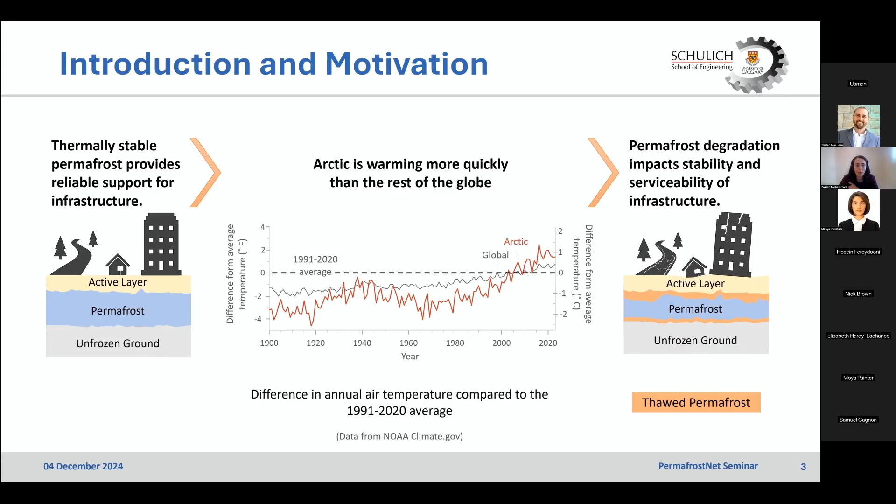This means both maintenance of existing infrastructure and planning for future development will be impacted significantly by permafrost degradation. To better understand this impact, we need to take a closer look at the challenges facing foundation design in permafrost regions.

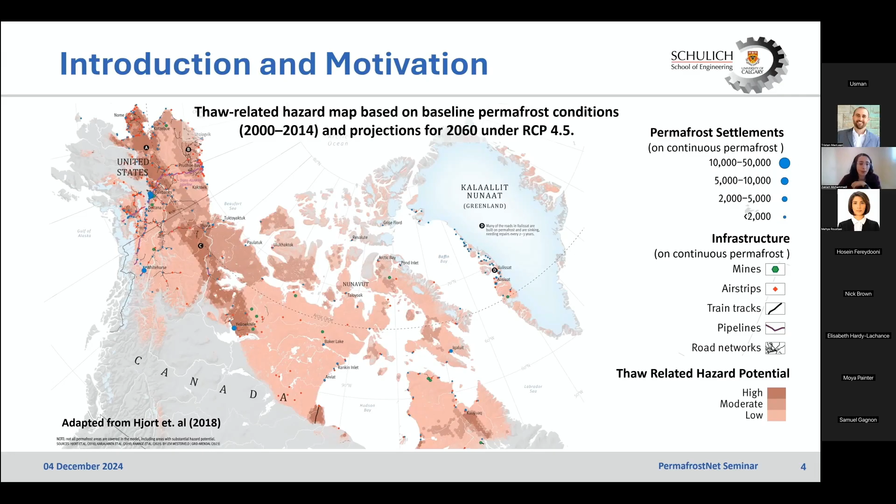One key challenge for infrastructure in permafrost regions is thaw settlement. Thaw settlement happens when thaw-sensitive permafrost, which changes in volume or loses strength after thawing, begins to thaw. Thaw settlement is a product of two main factors: thaw strain and changes in permafrost extent. Thaw strain mostly depends on ground material and ice content, while changes in permafrost extent are affected by baseline permafrost condition and alteration caused by climate change and human activities.

Traditionally, foundation design in thaw-sensitive regions was based on passive methods, aimed at keeping permafrost frozen to avoid thawing and prevent settlement. But with the accelerating pace of climate change, these approaches are becoming less feasible and increasingly expensive. This has shifted strategies toward active methods, based on designing foundations that can accommodate changes in permafrost condition, one of which is thaw settlement.

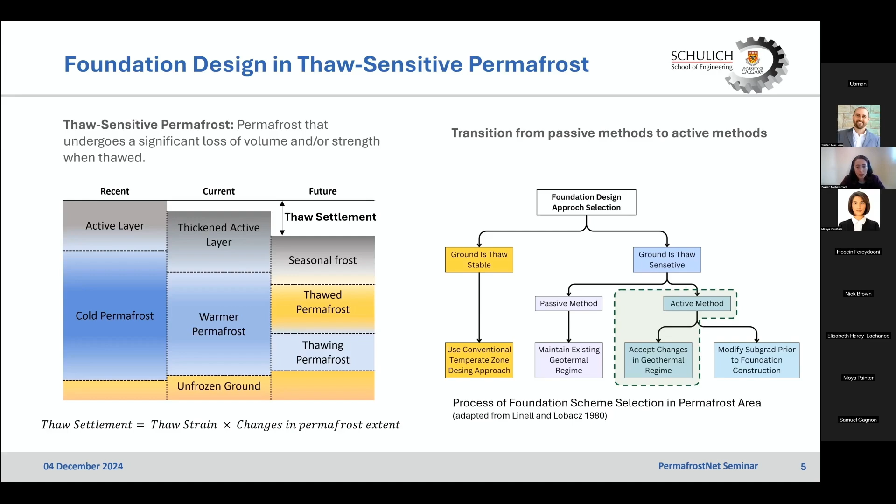So to effectively implement active designs, it's crucial to accurately predict thaw strain and the extent of permafrost changes. With this background, the overarching objective of my research was to develop a comprehensive framework for thaw settlement evaluation, because we believe this will become more frequently needed in the future with changing climate conditions and foundation design strategies.

To achieve this, we focused on several key goals: identify and centralize tools useful for predicting thaw settlement, improve prediction where there were gaps or shortcomings by developing new tools, improve our ability to identify thaw-sensitive regions, and finally create workflows that allow evaluation of thaw settlement across multiple scales.

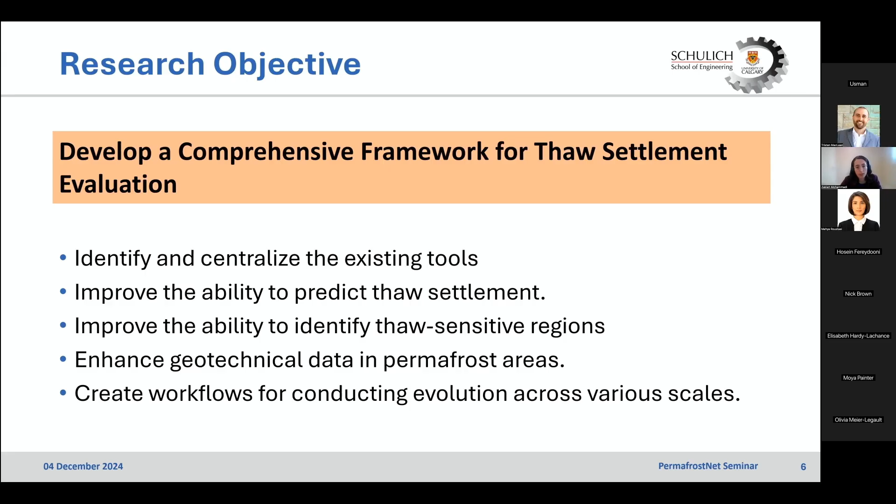To achieve these objectives, we used a systematic methodology, designed to address the gaps in existing thaw settlement tools and create new ones where needed.

So the process began by reviewing and centralizing existing tools, and this literature review helped us identify the gaps and try to address those gaps. Particularly, we could see that tools tailored for coarse-grained and highly organic soils were lacking.

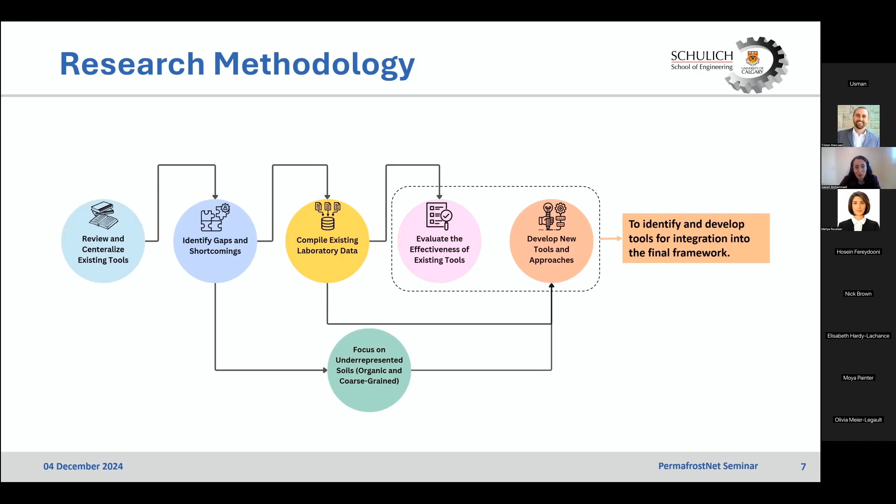We had fewer tools for these two types of soils. As part of this project, we compiled and digitized wide data on thaw settlement, because this was something we needed for addressing the gaps. Using the compiled data and the identified gaps, we were able to develop new tools and also evaluate the performance of some of the existing ones. I will explain the different steps we have taken in more detail in the upcoming slides.

You also can see the different components of the framework, which we mainly divide into two major categories. The first is used for large-scale vulnerability assessment, which helps identify thaw-sensitive regions using regional scale data. Then we have more site-specific assessment, which is focused on estimating thaw strain based on index properties collected during site investigation, so they rely on more site-specific data.

During the site-specific evaluation, we can improve the data that we have, like the amount of the data and also the complexity of the method that we use, to have a more refined assessment. So this is just an overview, and many workflows need to go into these components to create the complete version of the framework.

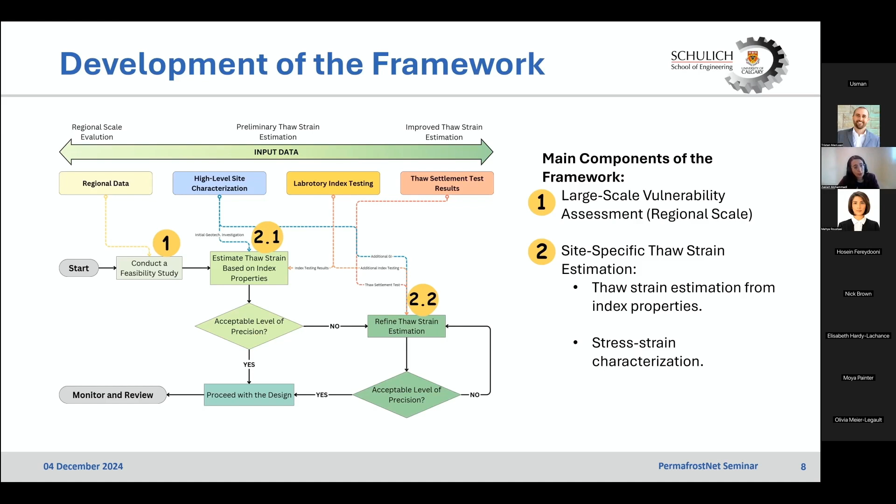So with this overview in mind, let's take a closer look at different components, and I will show literature review, what was already available, and what was our contribution for creating these components.

The first component is large-scale evaluation of vulnerability to thaw settlement. This component was integrated into this framework because we believed it is useful during feasibility studies. In terms of resources available to conduct this type of assessment, we have large-scale vulnerability assessment, mostly produced in a map format, showing thaw-related hazard maps for large scales, typically relying on coarse-scale geospatial data and climate data.

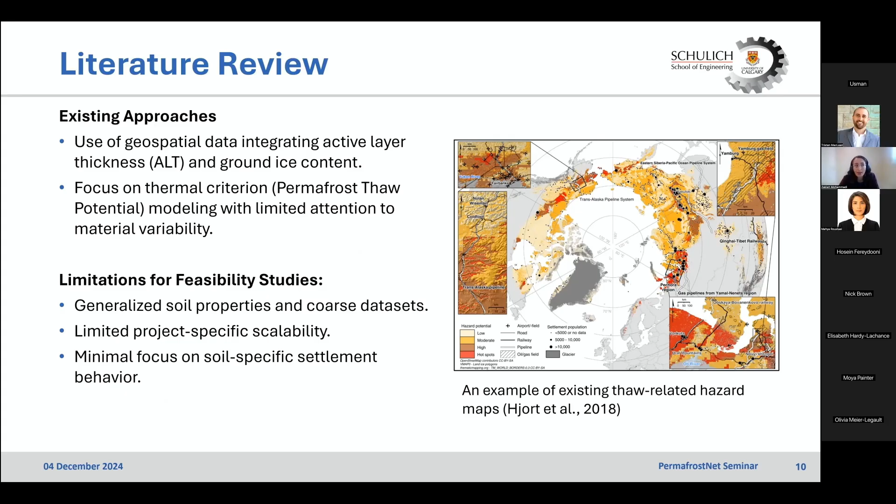Most of the existing approaches mostly focus on modeling changes in the active layer thickness, and they use ground ice to represent thaw strain. They kind of overlook the role of soil texture in defining thaw strain. So we decided to take a look at these gaps and try to develop some methods to address them.

To do so, we developed a new method which integrated soil texture into the evaluation of thaw settlement hazard more accurately, and we developed a Canada-wide thaw settlement vulnerability map using this approach. We also leveraged approaches used in developing the existing maps to create workflows and resources that can be used for conducting evaluation during feasibility studies.

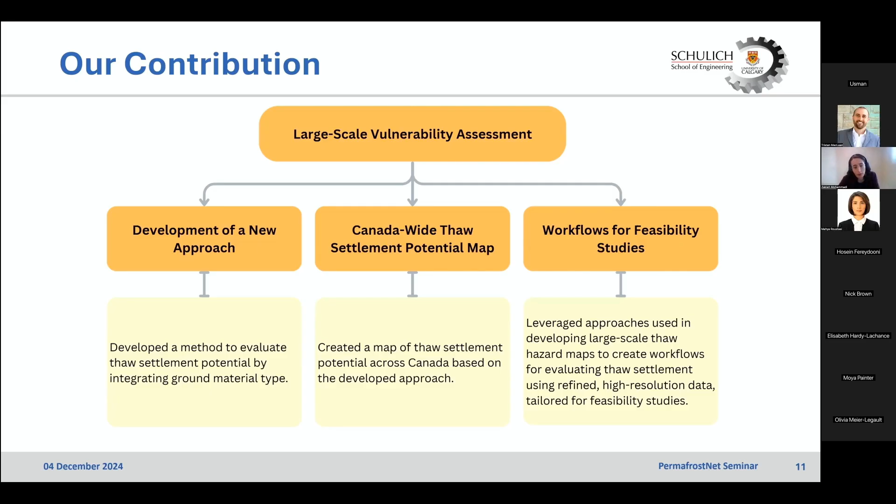So the approach that we developed was mostly focused on evaluating thaw strain. As I said, there are many maps and approaches focused on accurately representing changes in permafrost extent, or comparing the existing or current active layer thickness versus projected active layer thickness, and they kind of overlooked the thaw strain part of thaw settlement.

So we focused on this component, and we incorporated three key variables to assess what we call susceptibility to settlement: ground ice content, surficial deposit type, and bedrock type. The idea is this is some sort of assessment you can do during a desk study evaluation, so we wanted to rely on publicly available resources.

We used the analytical hierarchy process to assign weights to each variable based on their importance in defining thaw strain. So we were able to create an index called the thaw settlement potential index, and then we created a map of this index for Canadian permafrost, as you can see here.

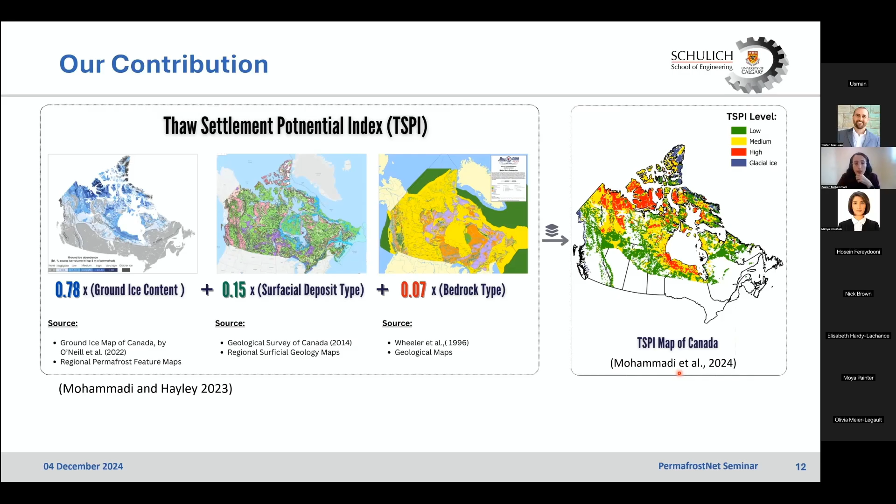To create this map, we simplified the changes in the active layer thickness. We assumed that near surface permafrost thaws, and then looked at the distribution of vulnerability to thaw settlement across Canadian permafrost.

Using some existing approaches and what we developed, we created workflows. The idea is that these workflows provide a step-by-step guide to conduct a desk study evaluation. We combined susceptibility methods focused on evaluating changes in permafrost extent with the approach we created that is mostly focused on settlement susceptibility.

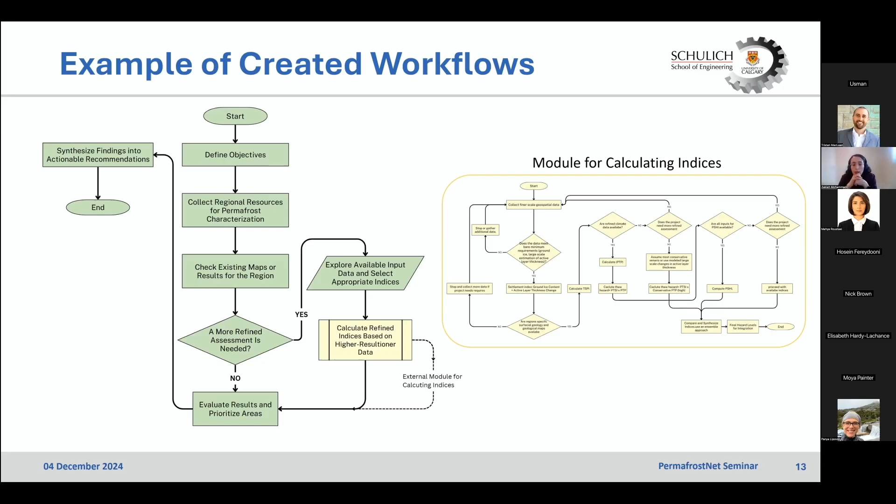We separated these two parts, and following these workflows, one can evaluate both separately and then integrate them at the end to have a better understanding of the hazard associated with thaw settlement. The process begins with defining the study scope and collecting relevant data, and ends with actionable outputs to support planning, for example identifying areas for future investigation, identifying more sensitive areas, and comparing development options and prioritizing different sites or roads during the planning stage of a project.

The other component we are planning to integrate into this framework is tools that are mostly focused on estimating thaw strain based on site-specific data.

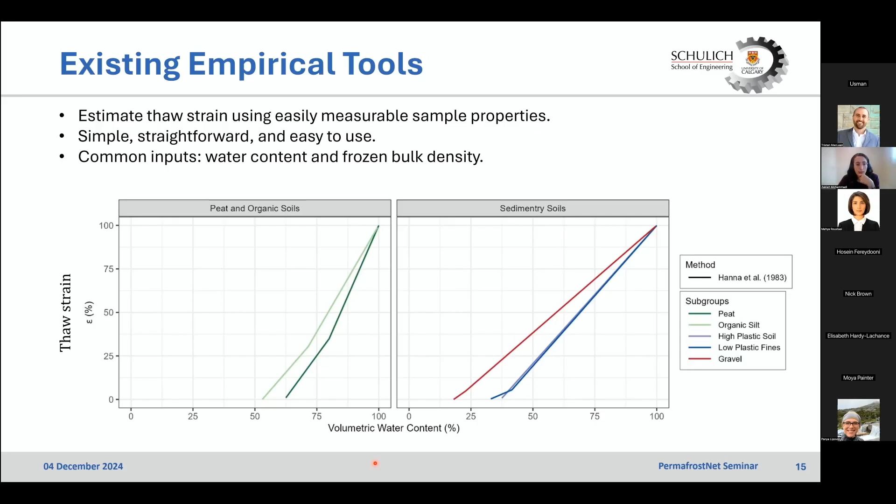When it comes to estimating thaw strain based on site-specific data, empirical tools are widely used. They are easy, straightforward, and use easily measurable properties like water content and bulk density to estimate thaw strain. Here is an example of a method developed by Hanna et al., which provides soil-specific correlations for five different soil groups, using volumetric water content as a predicting variable. This method is recommended in the Canadian Foundation Engineering Manual for obtaining thaw strain in thaw-sensitive regions.

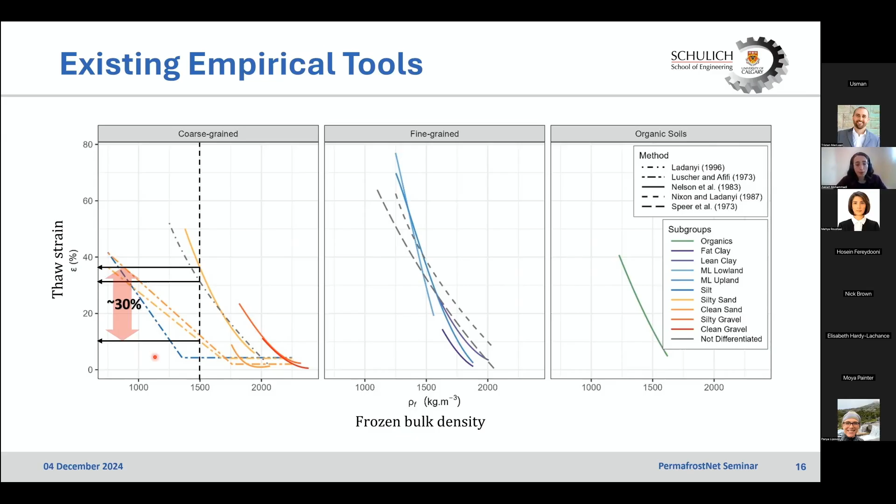These were some observations from our literature review. We then had to obtain laboratory data to develop new tools, evaluate the performance of existing ones, and identify tools that were more effective to integrate into the final framework.

We started by compiling a data set of thaw settlement test results and were able to identify and collect more than 400 samples. The data we collected included not only the thaw settlement test results, but also sample properties, index testing results where available, and grain size distribution.

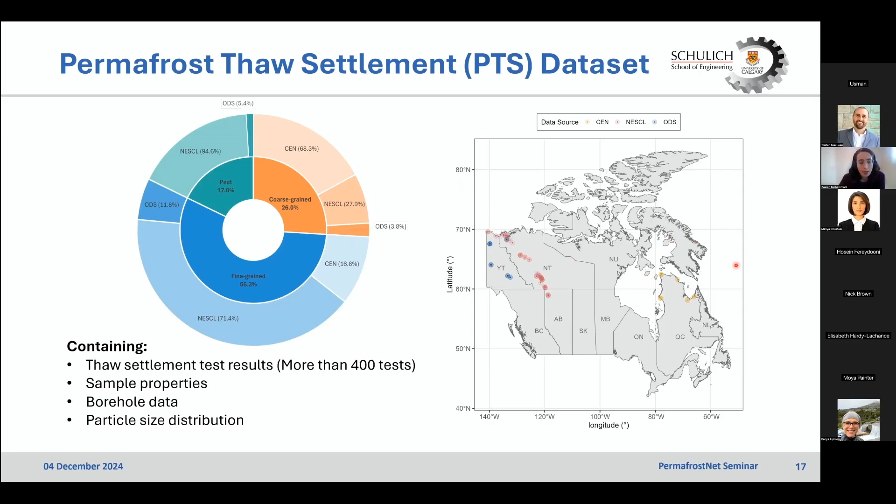The data set represents a diverse range of sample types in terms of soil group, and the samples come from different regions across Canadian permafrost, covering a vast geographical landscape. We digitized relevant information found in published literature and old consulting reports to create these data sets.

For each sample we had thaw settlement test results, which basically simulate one-dimensional thawing of a permafrost sample. In this test, a permafrost sample is thawed under a seating load, and its deformation is recorded.

Once deformation under the initial load is complete, additional loading is applied to develop the full stress-strain relationship for the sample. For these tests, we plotted thaw strain against vertical stress, and also plotted void ratio against vertical stress. Thaw strain and void ratio can easily be converted between each other.

From these plots, we were able to extract comparative parameters. For example, uppercase A naught, the thaw strain parameter, and lowercase a naught, the coefficient of volume compressibility. We call these comparative parameters, and we extracted them so we could compare across different soil groups to see the general soil settlement behavior across those groups.

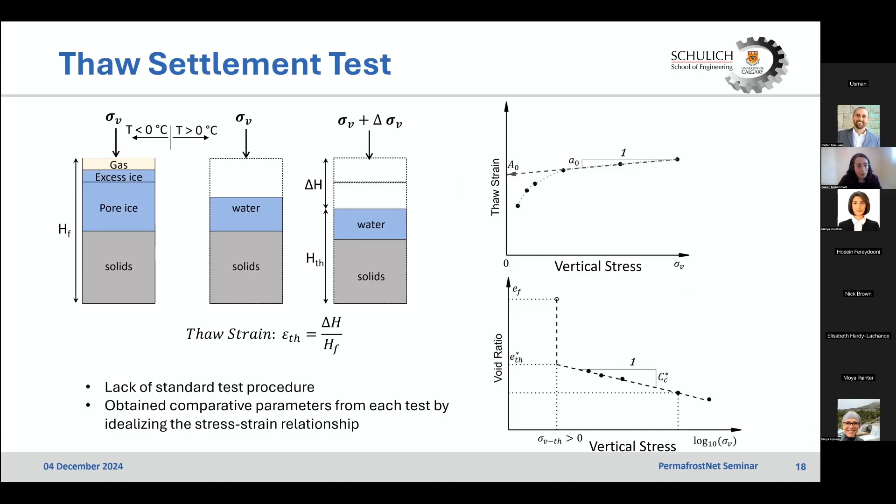For the coefficient of volume compressibility, we couldn't see that much dependency on sample being ice-rich or ice-poor, but there is a huge difference between values obtained for different soil groups, with the mean value of coefficient of compressibility for peat being about 8 times higher than coarse-grained soils and about 4 times higher than fine-grained soils. This comparison highlights the critical role of soil type in determining soil settlement behavior, and underlines the importance of having more soil-specific consideration in developing predictive tools.

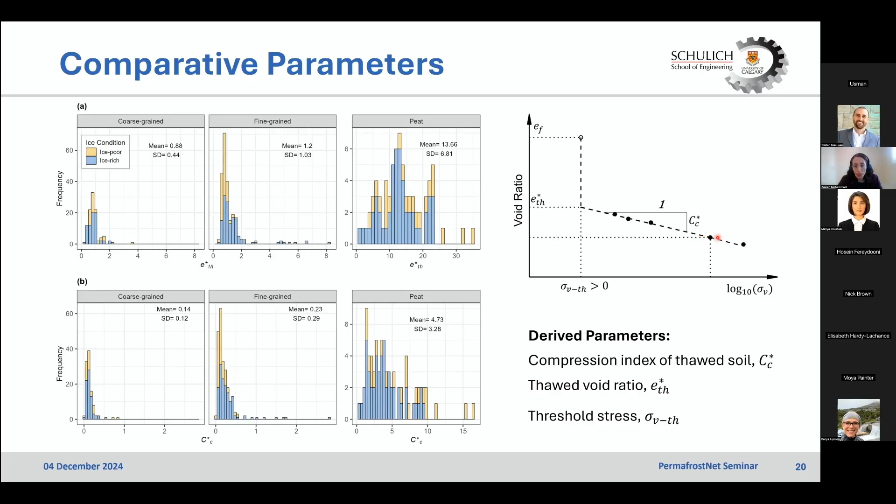With this data set, we were able to evaluate how well existing empirical correlations are in predicting thaw strain based on index properties. We used this data as a test data set to see which available methods are doing a better job predicting thaw strain for these samples. We made sure that the data we have was not used in developing these correlations, to avoid any kind of leakage in data, and then looked at the results based on that data overlap.

In these slides, you can see different boxes. Each box represents a group of methods that use the same predictive variable, and predict soil strain in a similar seating pressure. We grouped them to make sure the predictions made using these methods are basically very close to what was measured in the lab for these samples. The dots in the plots represent the experimental data from the data set we compiled. The lines show the correlations, and the color across all the graphs shows the major soil types.

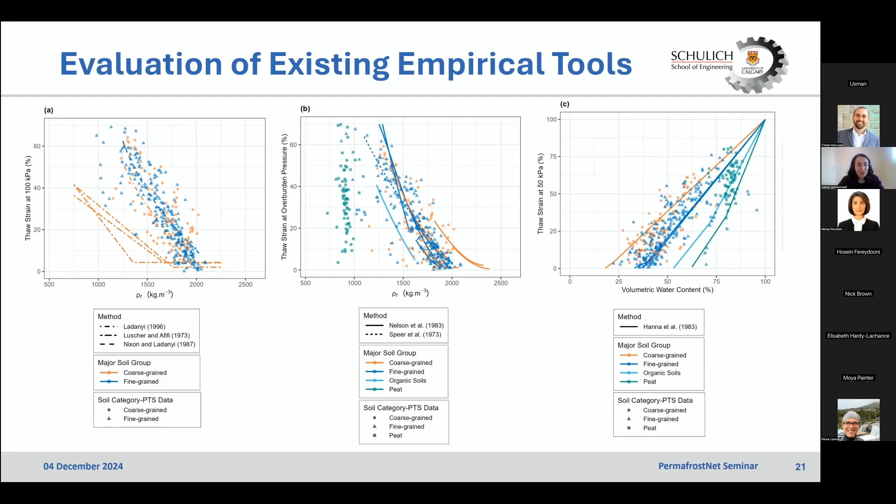To do a more systematic comparison, we obtained some metrics like root mean square deviation and bias. Having these metrics, we were able to quantify the variation in these methods against the experimental data more systematically, and you can see the results here. This comparison showed that the method developed by Nixon and Ladanyi results in the lowest deviation between predictions and actual thaw strains, and has a bias closer to zero for both coarse-grained and fine-grained soil. It's highlighted in bold in this table. This suggests using this method returns a more balanced prediction of soil strain.

We could also see that the other methods, including the one by Hanna et al., which is recommended by the Canadian Foundation Engineering Manual, have higher deviation and also higher bias. For some soil types, we had more experimental data available to do a better comparison; for others, the experimental data was scarce, so we were not able to do a good comparison. For example, the data set did not include much organic soil, but we had many peat samples. However, for peat samples, there was less soil-specific correlation developed, and the only method was the one by Hanna et al., which did not show good performance.

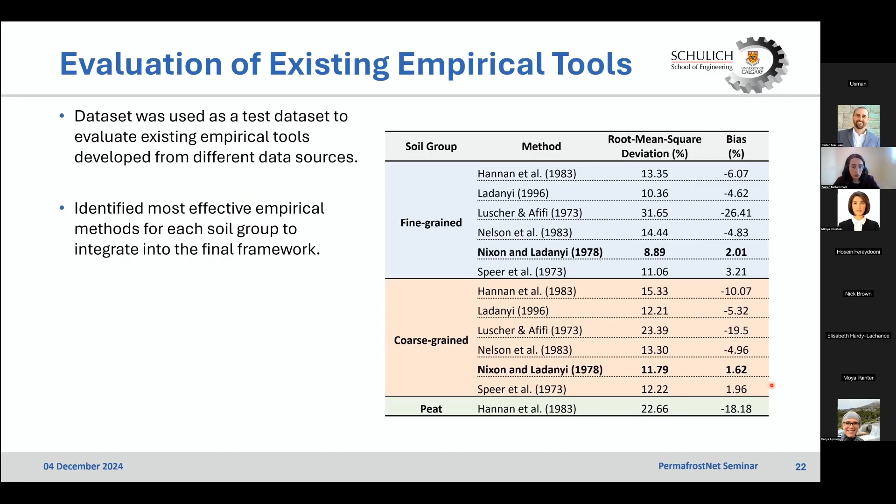With the data available, we decided to develop some new methods for these less represented soils. The other thing I want to quickly go through is the characterization of the stress-strain relationship. I already showed you these plots, and the idea is to obtain the relationship between the void ratio and vertical stress.

There was already some work done by Dumais and Konrad on fine-grained soil focused on obtaining the relationship. So again, with the data available, we focused on the soils that were less represented, including coarse-grained and peat samples.

The idea was to obtain a correlation between the comparative parameters highlighted here and index properties. With the index properties, one can construct the full stress-strain relationship, which is useful for soil strain estimation and for numerical modeling of soil settlement.

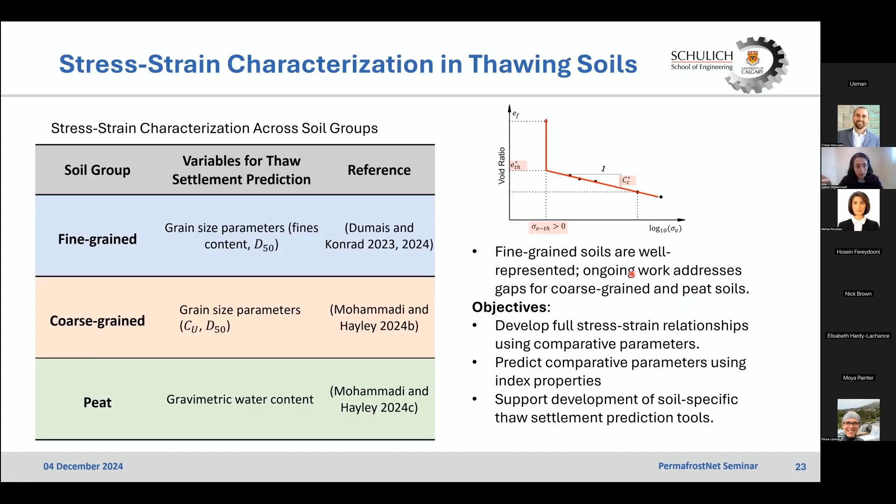We focused on coarse-grained soil. For example, we were able to use some already existing empirical tools for predicting minimum void ratio, and to develop some empirical method for predicting thawed void ratio.

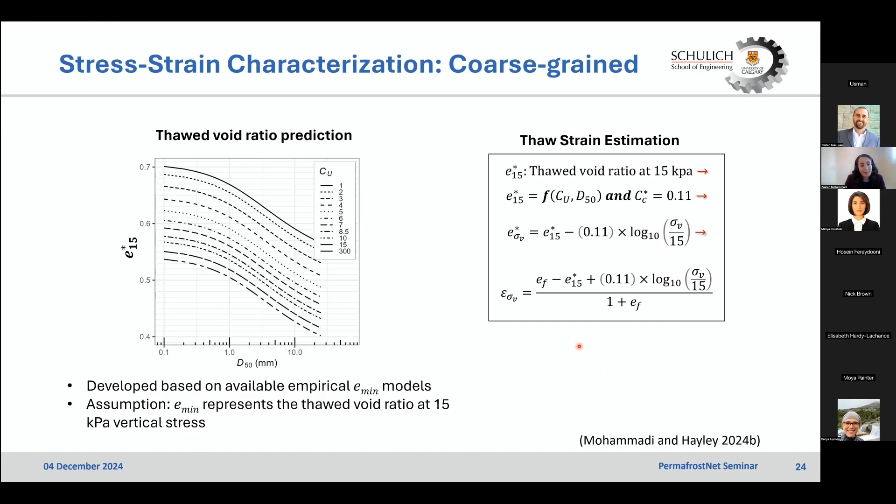We created graphs that let you obtain thawed void ratio at a specific vertical stress, here 15 kPa. Using this thawed void ratio and the compression index based on experimental data, one can obtain thaw strain at different pressure for coarse-grained permafrost samples.

We also tried to use data on minimum void ratio as a resource for predicting the thawed void ratio, but instead of using parameters extracted from the grain size distribution, we asked: what if we only rely on the visual description of the soil?

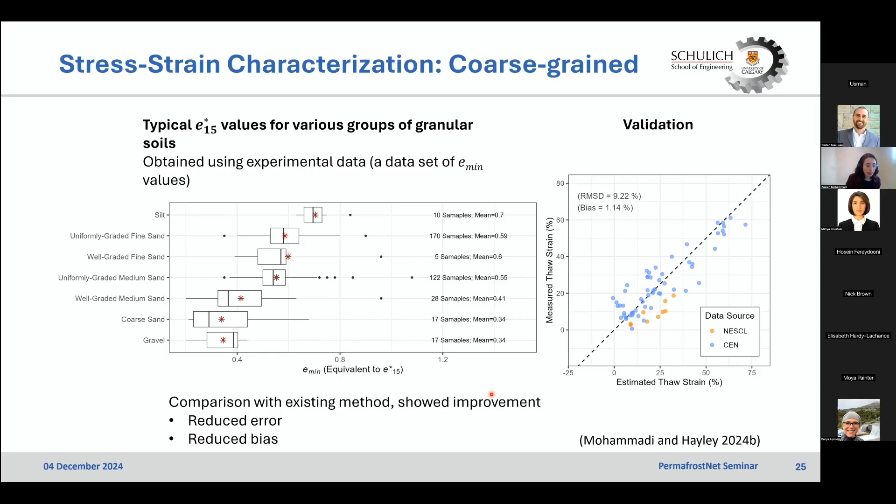We obtained some values for different soil groups, then compared the predictions made with the measured values using the Thaw settlement data set. This comparison showed that, compared with the methods already available, the methodology we developed showed a reduced bias and also a reduced root mean square deviation error.

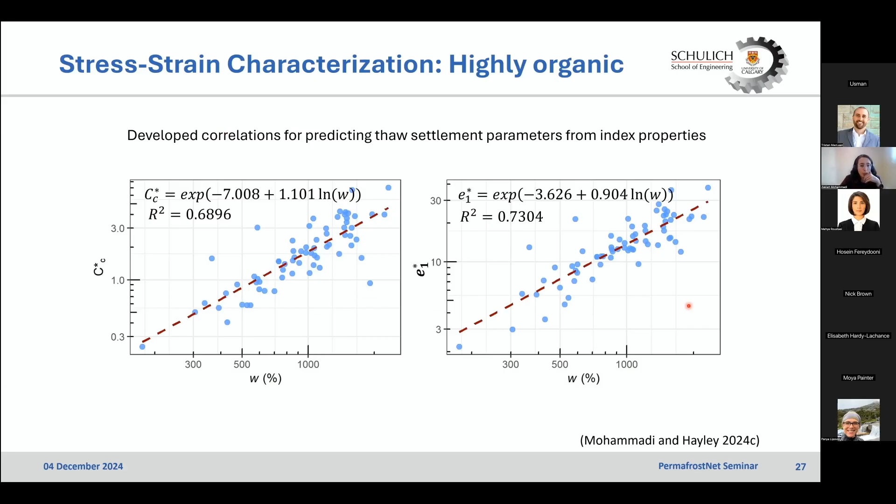So we developed some correlations, and to make these correlations easier to use, we created simplified charts that one can use to obtain various components of Thaw strain based on water content and other properties like initial frozen bulk density, frozen void ratio, and applied pressure.

Specifically for fine-grained soil, it's really important to account for the applied pressure because of high compressibility, and also important to account for a time-dependent component of Thaw strain.

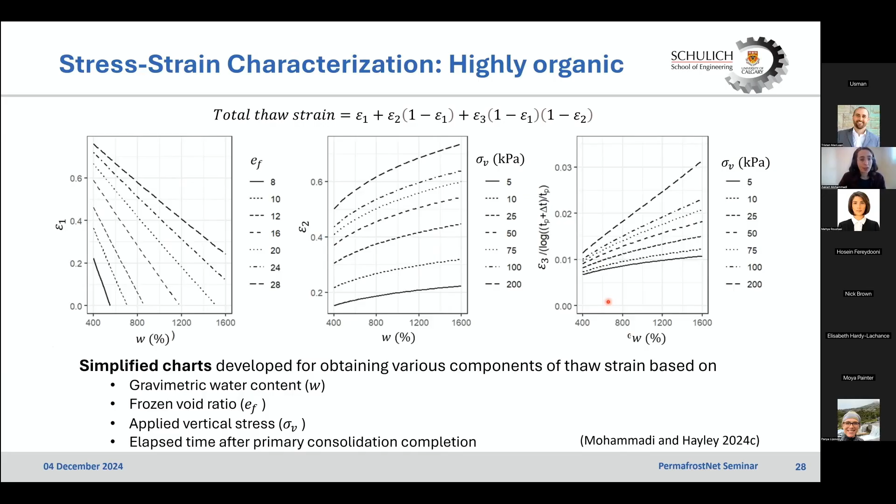The methods we have developed for these two types of soil will be integrated into two sections to create step-by-step workflows for obtaining Thaw strain or stress-strain relationship based on index properties, or even to idealize thaw settlement test results to more accurately obtain a stress-strain relationship for further use, for example for thaw settlement estimation or for numerical modeling purposes.

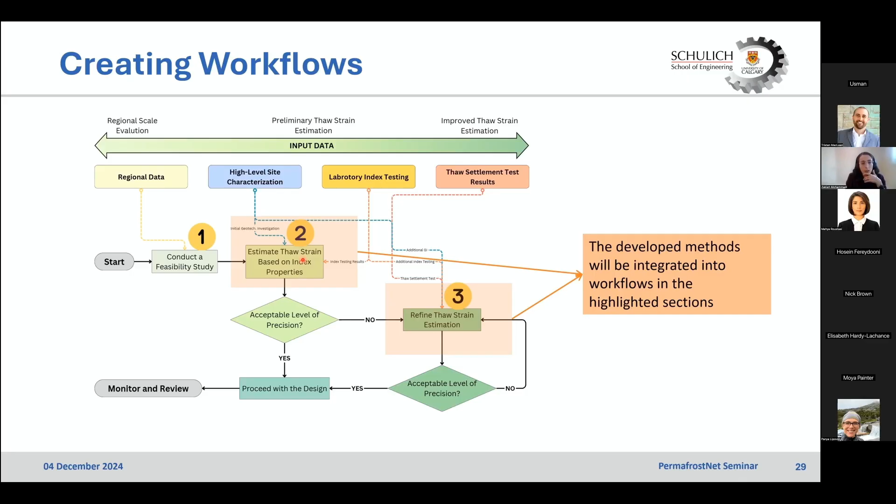To summarize what I presented, as part of my PhD project we developed tools and workflows for evaluating thaw settlement potential at regional and site-specific scales. The main objective was to enhance our understanding of thaw strain and stress-strain relationship across different soil types, and to improve our ability in estimating thaw strain.

We tried to create a comprehensive data set of thaw settlement test results to support not only our work but also future work, because these data sets will be published and publicly available. The idea was to contribute to the geotechnical data for permafrost regions by compiling this data.

Future work for my project includes finalizing the framework and the workflows and creating guidelines that are accessible for final users, which I assume should mostly be practitioners in the north.

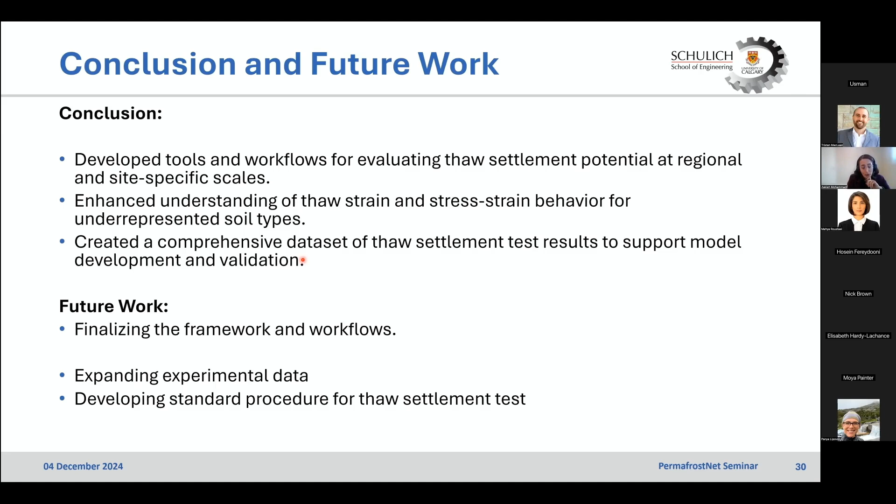In general, in terms of thaw settlement evaluation, I think there is a need for more work on expanding the experimental data that we have, maybe more systematically designed experimental programs. The other thing is to develop a standard procedure for thaw settlement tests, since this is something that introduces uncertainty into this assessment.